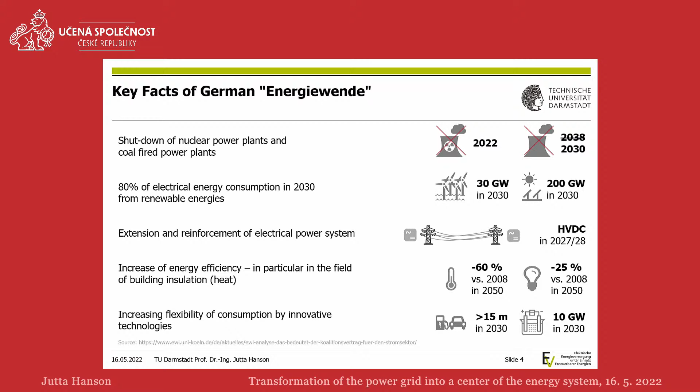The flexibility - we spoke about the complex network that is ongoing. You see here some cars, yes, of course, electrical cars, and it is intended that we have more than 15 million within 2030. This, of course, is a big challenge for the network because of the current needed to charge them. And we need a different possibility, because we speak about PV, we speak about wind, and you know this is not there all the time.

We need something reliable, and therefore we think one way is to have it with gas. Here you see the electrolyzer, and we want to have more than 10 gigawatt in 2030. You heard...

Very, very high numbers, and now let's put them together with our electrical network. What do we need at the moment? On the left side you see what we need as power - 80 gigawatt is the highest power which we need. And within one year, we need 600 terawatt hours within the German networks. Put that against our power plants. If we just talk about the load, 80 gigawatt, then we need a number of 54 nuclear power plants, if we assume a certain amount per nuclear power plant.

And if we say, no, we need it the whole year, then we know a nuclear power plant can be in operation 7,500 hours per year, and it comes to the same number. But this, of course, changes if we go to wind or to PV. You see that the power of a single wind turbine is much smaller - we are here with 2 megawatts, which is at the moment the average. It is not the highest power rating, but if you look at the average installed in Germany, then we are at 2 megawatt. And then we need 40,000 wind turbines if we just want the power.

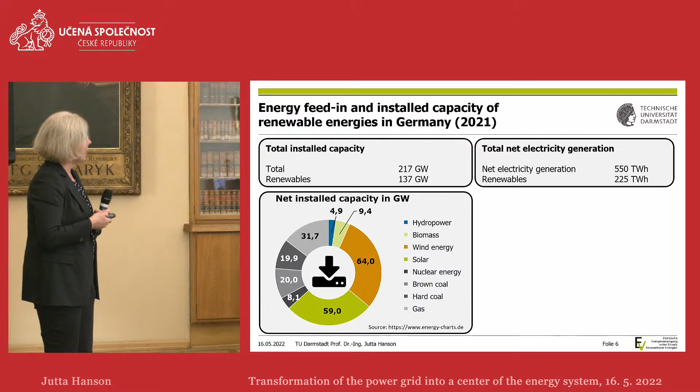This is how it is split up, and you see we have more than 60 gigawatt wind already installed. We have up to 60 gigawatt PV installed, but we want to have 200, keep in mind that one. And out of the 64 gigawatt of wind, we have not more than 8 gigawatt for offshore, and we wanted to have 30. And this is where we have to be faster.

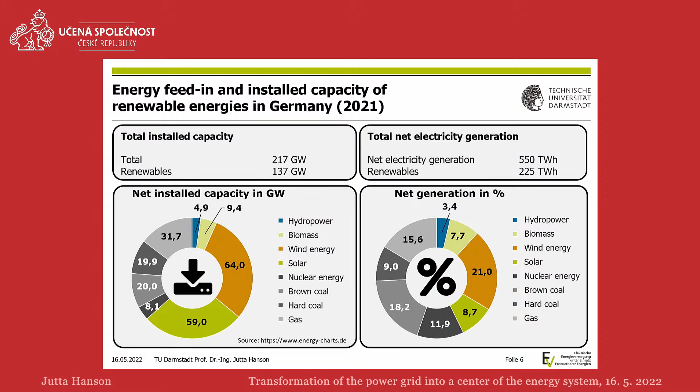And now check how the picture changes if we go to the energy. Of course it changes, because our coal-fired plants we can use more or longer within the year than we can with the wind or with the PV. And you see the reduction here from the PV, which gets a smaller number because we only have 1,000 hours per year. And the same we see here with the wind. We can discuss biomass, we can discuss hydropower, but the potential in Germany is not there. The numbers will stay like they are at the moment.

Now, what does that mean for the electrical network? Now come a little bit closer to the transmission and distribution. We have new generation within the network, and we have distributed generation. This means we have it on the roofs, we have it somewhere in rural areas, but we do not have it where we had it before. We do not have it in the area where we have coal, for example.

But on the other side, we have off-consumer generation, so we have big wind farms which we have offshore. And we also have hydropower, not our hydropower, but with our neighbors. So they are still there. And this argument is always needed if some people believe that we can have everything locally within a small area, everything distributed. This is not true. We also need our highways we spoke about. We need the transmission network.

But also how we have our generation is different. We have fluctuating generation, volatile generation, and we need a weather forecast. So our generation depends on the weather forecast, and this is not good news, because you probably believe in weather forecasts, I do not really, and therefore we have here an inaccuracy which we have to deal with every second.

And we have new generation units. Our synchronous machines, the typical type of machine within our coal-fired plants, will disappear, and we get something which is made with power electronics. Power electronics is a perfect technology. Everything is possible with power electronics, but you have to learn those systems, and this is not as easy as it could be. So this is one of the very big research topics, how we can have a stable network with all these power electronic units. So we have a change in the generation.

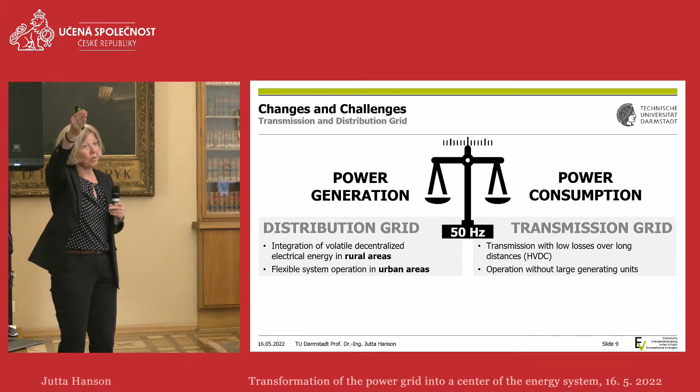What happens with the transmission grid? We already said that we need a highway. We need a highway to bring the power from the northern part of Germany to the middle or to the south. So transmission with low losses over long distances. This is our task. And please keep in mind, in the past we had the big or large generating units. They are not there anymore. We have to operate the network without those power plants, which is a challenge.

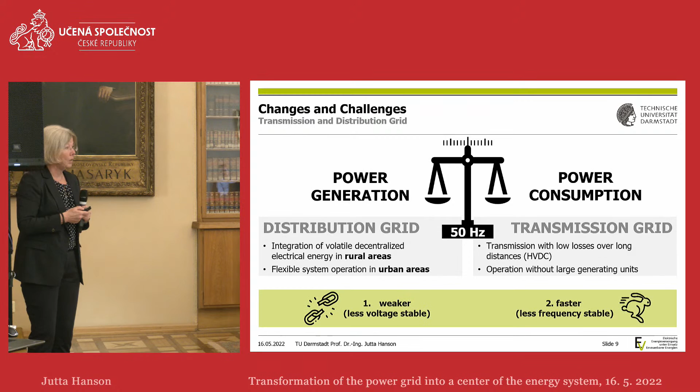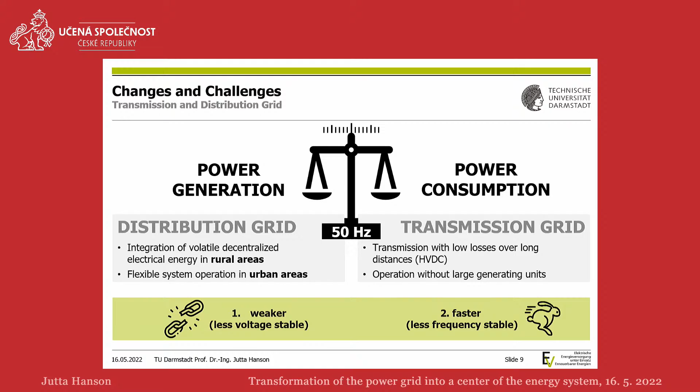We can say, and you already saw, that without those large generating units, our network gets weaker, and an expert would say less voltage stable. So we have problems staying at a constant voltage, and it is faster, and it is less frequency stable, because the change in frequency, if we have a mismatch between generation and consumption, is just faster because our inertia is missing. Our big power plants are missing. So this is our challenge.

So that's what we have to do within Germany. We are not the sunniest state within Europe. We have to use the renewables wherever they are. So the sun at the moment more in the southern part and the wind more in the northern part. Our major concern is how this network stays stable, especially if you talk about system splits.

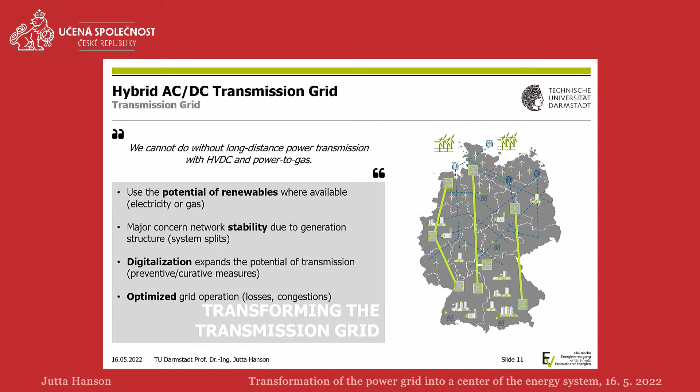And just imagine what happens if we have a windy day. We have wind here in the north and we have consumption in the south. If the network is really split in the middle, we do not have any chance that both networks stay stable. At the moment, it is not guaranteed that every partial network can stay stable. So this is one of the biggest tasks we have at the moment. But we do not want to complain, because we have new tools that we can use.

We can change our network operation. We can change our network planning. Because probably if we have power electronics, which is very fast, we can use it to get into action when a fault happens and not just in advance within the planning stage. So this is, of course, something which we could have, and we call this curative measures. So just do something if something happens within the network and not before. And then we probably need less network.

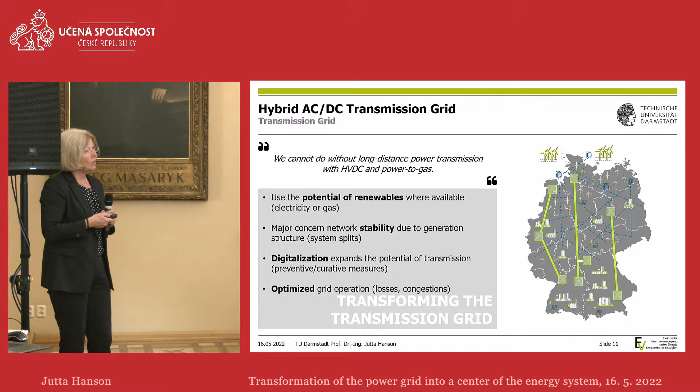The optimized grid operation should be a normal thing for us. As I already said, what we do not lose on the way from the generation to the customer is nothing which we have to produce. So you see here within the title, hybrid AC-DC transmission grid. This is something very new. Hybrid for us means that we have the combination between our normal AC network and those DC transmission grids. And our research deals exactly with those transmissions and what happens if we have more of those DC circuits within our network and we have an overlay network.

What happens now within the distribution grid? That what you recognize from your homes. Start with a rural area. In rural areas, as we already mentioned, we have wind, we have PV, we have renewables everywhere. The normal way would be that we have power plants within our top voltage levels and they feed those networks from both sides. Now it changes. We have the renewable energies at this part and we call it all for one and one for all. And what happens with this wind power if this city, for example, does not need the wind? We can feed it back to the high voltage level, but this is not what we call efficient. So we intend to have those wind farms used with more than just one network, which is new. This was not done before, so we have to change the principle of the network.

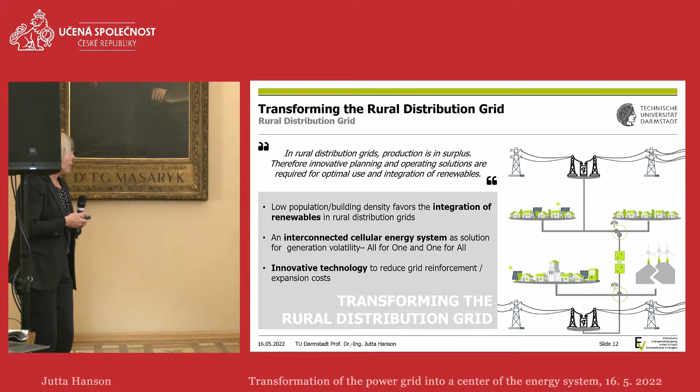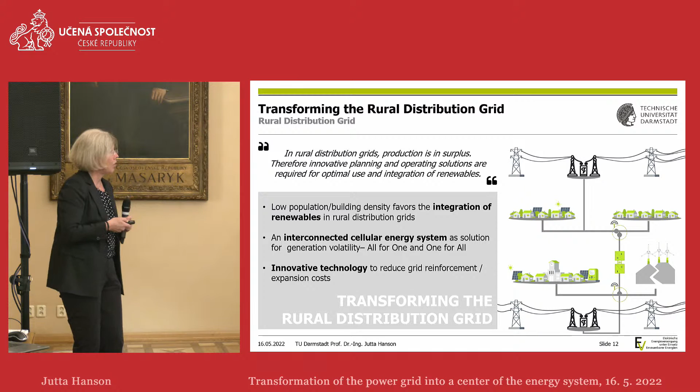And if you change the principle of a network, what you have to do first is to check the network protection. So what happens if a fault occurs? Can you recognize that fault and then can you split it out of the network, switch it off? We need innovative technology, which is not what we have at the moment, and here again you see those converters where we go from AC to DC and backwards. But this is within the medium voltage network, not within the high voltage network. So we think about new principles so that we can really have a combination and operate those networks in a different way.

So here now the research focus. We learned about the distribution networks with a large number of decentralized generation plants and a large number of operating states, because the wind is blowing, you have a wind turbine over there, a PV installation on the other side. And at the moment we have one criterion which is always limiting the integration of decentral energy generation. And what is the limiting factor? It is the voltage, because we see the voltage is going up, so we need solutions, because if you can solve the voltage problem, then you have more renewables within the network without building new network lines. And that, of course, is a good idea.

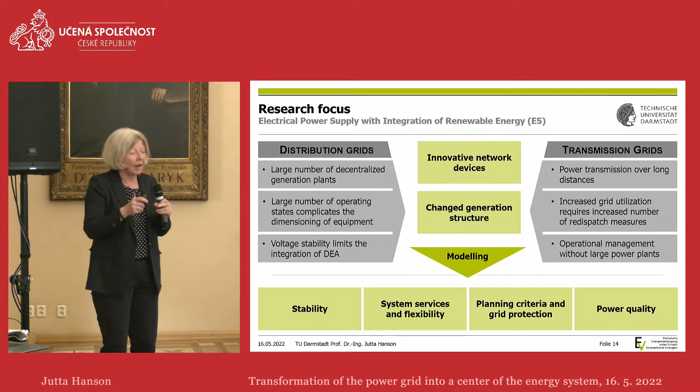And we have to take care about the power quality, which for us in the normal case means voltage quality. Because we get rid of all those linear consumers, we have power electronics with a lot of harmonics. I know this is very technical, but we have to take care, and we will do.

this overlay network, and we investigate how can we have this one in a meshed system so that we really have more than just these point-to-point transmissions. How can we enable here, for example, rotor angle stability, so that we really have a defined behavior between the voltages in the north and in the south.

Within Delta we want to find out: do we have a quarter solution? So how do we have to build the quarter so that we really can say we are as local as possible? And this is what we want to have with storages and consumers and generation.

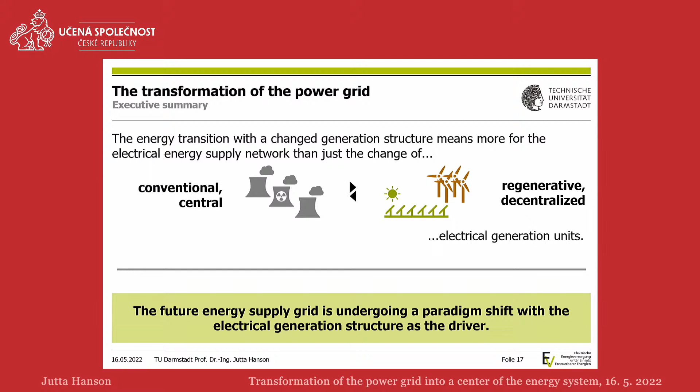central to regenerative, so renewable or decentral units. This is not what we do. We change the principle, and that we always call a paradigm shift within the network. It is totally new what we will get in the future.

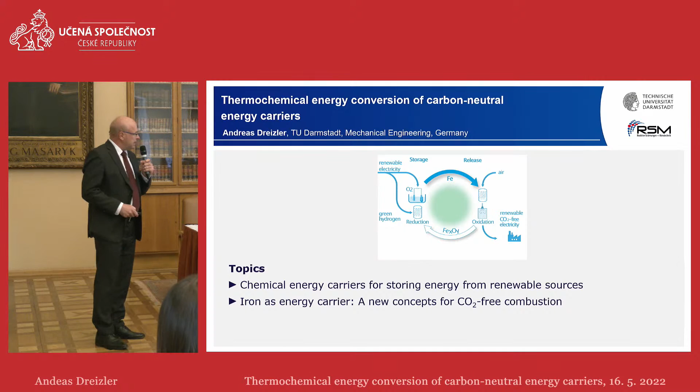Ladies and gentlemen, it's an honor to be here and talk about some aspects of thermochemical energy carriers that can be carbon neutral and can be of high importance for the transformation of our energy system. There are two topics I would like to cover. First, I would like to discuss that chemical energy carriers are one possibility to store energy from renewable sources. And in the second part, a little bit out-of-box thinking, a new idea to make use of iron as an energy carrier that can be used later on for CO2-free combustion.

Looking at the challenges, transforming the energy system means, as we have just heard, affecting all sectors: electricity, heat, mobility, industry, buildings. Sorry for taking Germany as an example again, that's where I have the numbers. In 2020, we contributed roughly 740 million tons of CO2 equivalents, corresponding to a little less than 2.2% worldwide.

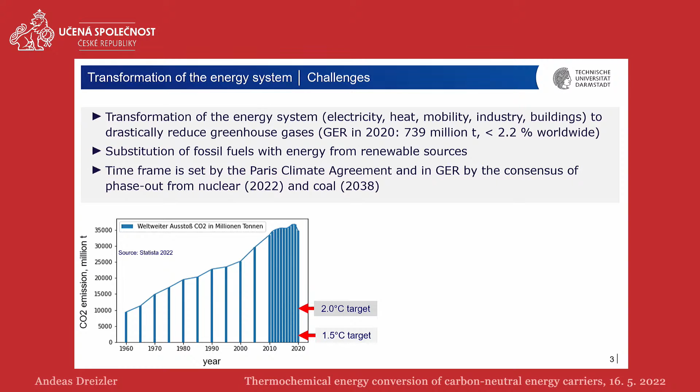To reach the targets set by the Paris Climate Agreement, we have to reduce significantly to reach the 1.5 degree Celsius target. That's quite ambitious. In addition, at least for our country, we are phasing out of nuclear energy, and the plan is to phase out of coal as well. So we have to act now.

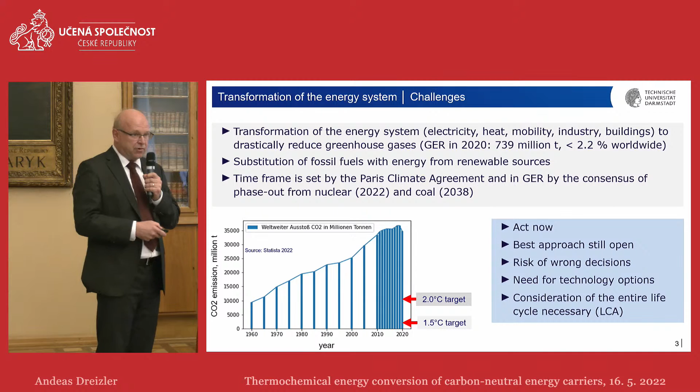I just repeat what Jutta said, but from my perspective, it's not clear which pathway is the best. If you do not know exactly which action is the best one, it might be different for different countries, and there is a risk of wrong decisions. So from my perspective, we need technology options, and for that choice we need the entire life cycle, the carbon footprint, to be considered. LCA is, I think, a very important aspect and needs to be developed much further.

I would like to focus on power generation to follow up on what Jutta was talking about, and give some more background information about volatility. Looking back 2 years, we needed 545 terawatt hours. Jutta had very similar numbers, maybe not exactly the same. Looking at hydropower stations, taking the largest one in Germany, that would correspond to more than 80,000 hydropower stations, to give you an idea.

We look here at the capacity profile over December 2019. We see that in the peak we need 80 gigawatts. We see a constant contribution by hydropower and biomass, which cannot be easily expanded. We see nuclear here in red, which will be faded out by the end of the year. On the other side, these small yellowish areas are due to PV, because it was December, so not too much was produced in Central Europe. The remaining part, shown in greenish color, is wind, and the rest is from fossil fuels: lignite, black coal, but also gas, which we know we have to change.

There are times, like this day, where wind was quite significant, but we also see a short dark period around Christmas where almost no renewable energy was available. So for the moment we have an energy mix of fossil, nuclear, hydro, wind and solar. We already heard from Jutta that integral values for renewable energies are between 40 and 50%, but if you look at a certain instant, it can be down to just a few percent.

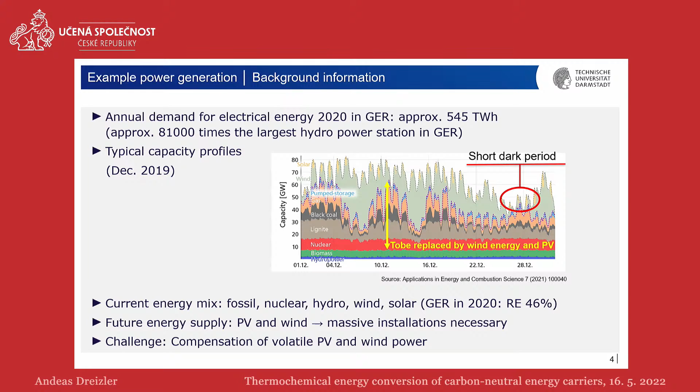In the future, we need a massive installation of PV and wind, but the challenge remains that they are volatile, as we have seen. So we have to compensate for this volatility. We've seen these numbers as well: full load hours for PV below 1,000, wind onshore 1,600, while lignite, for example, a conventional central power station, is much longer.

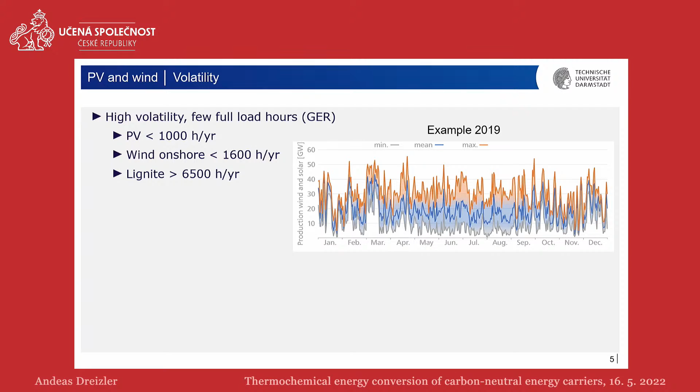To give you here the temporal fluctuations, you see the production rate of wind and solar over the year 2019. If we take just the mean value, the dark blue one, you see we provide here in the order of 20 gigawatts, which means, as we already have installed in the order of 120 gigawatts, the installed capacity must be much larger than the required capacity.

Looking at the future, depending on the scenario, depending on electromobility and so on, the numbers go up to 600 gigawatts. You have read in certain scenarios from DENA studies, for example. That means a factor of 5. I would say it's more or less impossible to get those systems installed in Central Europe.

So what we need, from my perspective at least, is storage and transport of energies that came from renewable sources, but not necessarily from Central Europe.

Looking at the possibilities of how we can store energy, you see here a chart showing how you can classify that, for example using the storage capacity, which ranges from kilowatt hour to a terawatt hour, so a logarithmic scale. You see as well, in a nonlinear scale from milliseconds to year, the so-called withdrawal rate. That is the time you can extract energy at a power level of that specific energy storage.

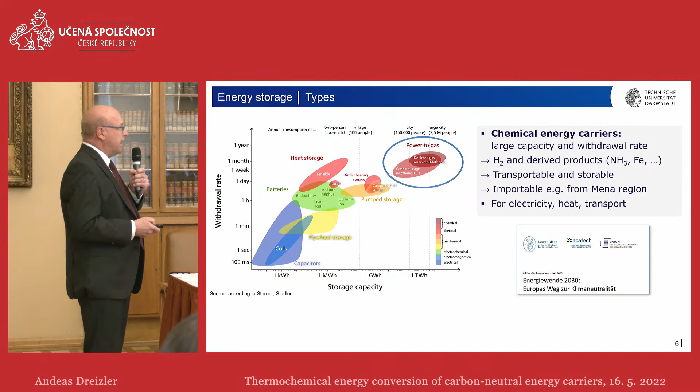I think we should look as well at other carriers of renewable energies that could be green ammonia. It could be metals, like iron. Those are transportable and storable, and they can be imported maybe from the MENA region, the Middle East and North Africa, where partnerships have to be built up. Maybe we can import energy as we do now.

Once shipped to Central Europe, you can use them to generate power, to generate heat, and for transport. So the take-home message from this chart is: chemical energy carriers are best suited for storing energy, at least at large quantities.

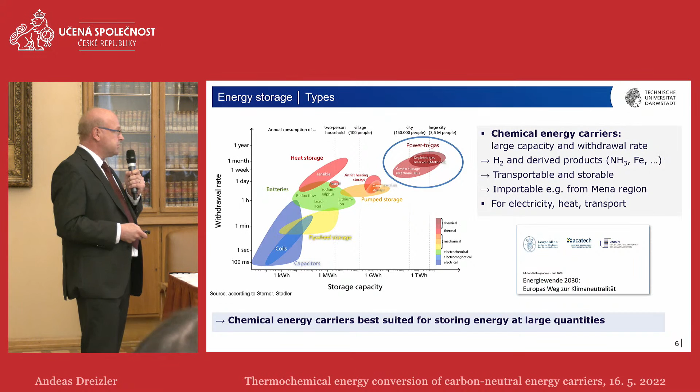Now, if you take these chemical energy carriers to store renewable energies, you can distinguish them further. One possibility is to take, for example, synthetic natural gas, meaning one that contains C atoms, or liquid fuels as well, synthesized making use of renewable energies, like methanol or oxymethylene ether, which is a surrogate for diesel fuel.

To make them really CO2 free, you have to extract the CO2 from the atmosphere, because afterwards, after use in engines or in fuel cells, it doesn't matter, you will release the CO2 again. To have a closed circle, the atmosphere is part of the thermodynamic system, and that is not coming for free. Looking at different studies, you find numbers between 20 cents to 50 cents per liter, or 100 to 200 euros per ton of emitted CO2 equivalent.

That's one possibility. The other one, you can go carbon-free - we just mentioned hydrogen, ammonia, maybe metals, semi-metals, non-metals. Then, because there is no C element involved at all, it can be CO2 free, and the atmosphere is not involved. Let's have a look into their properties, and I'll just take here one chart about it.

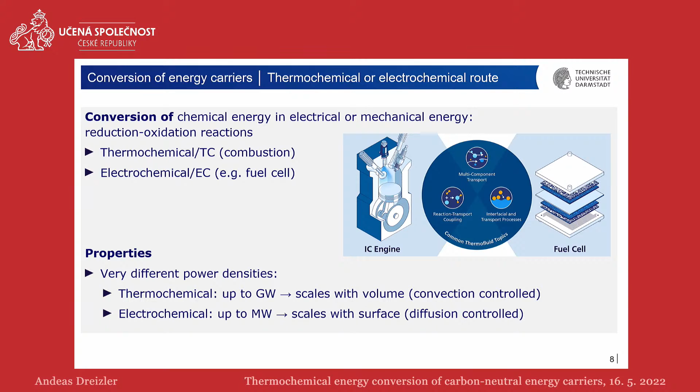So as an interim conclusion: chemical energy carriers are needed to store energy from renewable sources, and it depends on the application whether electrochemical or thermochemical energy conversion is better. You cannot say one or the other, because once you need higher power densities, you need thermochemical pathways, meaning combustion technologies will be part of the solution.

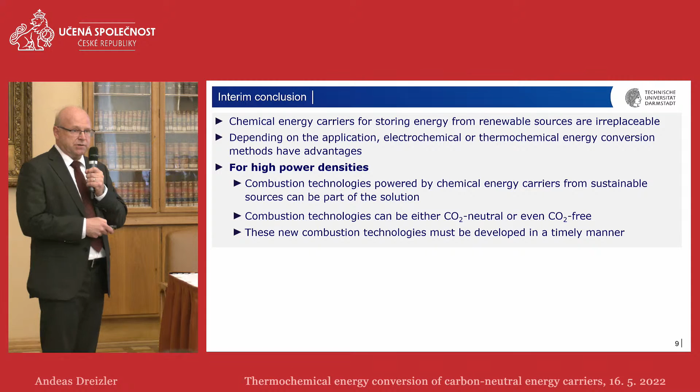That's my strong belief. As I've said, combustion technologies fueled with hydrogen, for example, will be CO2 free. If you use synthetic natural gas, they are at least CO2 neutral. But those combustion technologies do not exist commercially yet. For example, people talk about hydrogen, but there is not yet any commercial gas turbine that can be operated with 100% hydrogen. Doesn't exist yet. It needs to be developed in a timely manner.

And that brings me to the second part of my talk. There are technology options to make use of hydrogen, of ammonia. I will talk about why this is typically used in connection with hydrogen, or has to be used in connection with hydrogen. But most of the remaining time I have, I will spend on using iron particles. So we start with hydrogen.

There are, of course, different ways, and all of you know about the fuel cell, but there are other ways too. They provide very high thermodynamic efficiency, and almost no one knows about it. This idea is not actually very new, it already exists for some years. This is the argon hydrogen engine. It can be used for stationary power and heat generation, and the potential is thermodynamic efficiencies up to 80% if you take a compression ratio of 20.

The idea is the following: you take hydrogen that has been produced from green energies, and then drive the engine cycle with argon. Argon has no rotational and vibrational degrees of freedom, so you don't have these compression losses. Then you inject hydrogen and oxygen, and burn it with very high thermodynamic efficiency. You receive water, and argon has to be separated from the water and kept in a circle. This is why you can only do it stationary.

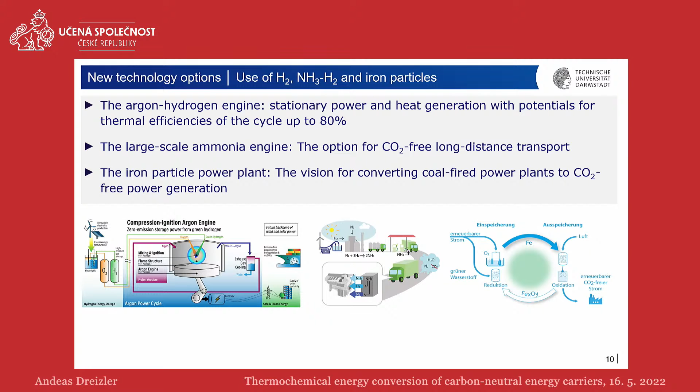And the last idea is about the usage of iron in particles and build central power stations out of that, or making use of coal-fired power plants and convert them. We call that retrofitting. That's an idea, and you have to consider that currently more than 1,000 coal power plants are built worldwide, and 2,000 or more are planned. And those are typically operated for decades, maybe 50, 60 years. And you need options to make them lower in their carbon footprint.

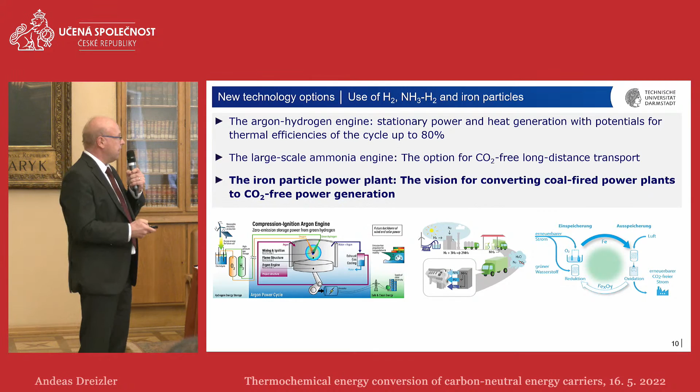And so this is what I would like to give some more ideas about, and this is what I said, a little out of the box. It's a relatively new idea, and you see in the background the idea of using renewable energies in connection with central power stations that already exist, and make use of iron and its oxides and guide them in a circle. And this circle is shown over here.

I guide you through. We start with the iron oxides. This is rust in particles, and this can be chemically reduced, making use of green hydrogen that has been produced by electrolysis from renewable electricity, in fluidized bed reactors. That is one possibility. The other one is you dissolve it in an electrolyte and go the direct pathway using renewable electricity, and electrochemically you reduce the oxides back to elemental iron.

Once you have done that, you put it, for example, on a ship. You take it from, I don't know where, Australia, from Morocco, wherever you have your partners, and ship it to Central Europe, containing now the renewable electricity in a chemical form. And then you burn it with the oxygen from air, again using fluidized bed reactors, or these are dust firing power plants. The most coal power plants in Germany are dust fired, where you have different diameters of particles. But this is maybe a detail we don't have to discuss over here.

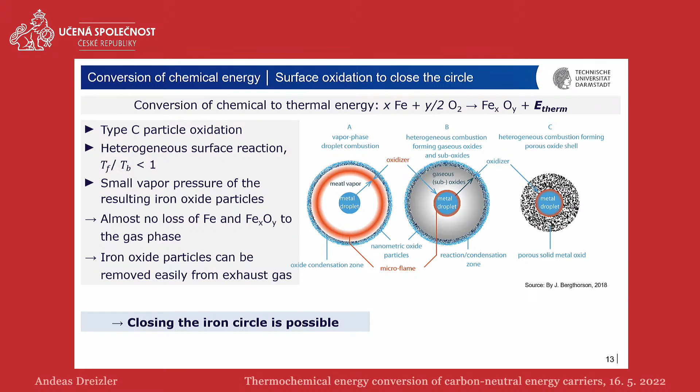And that is why the iron oxides as particles can be removed from the exhaust gas by a cyclone or by a filter. So closing the iron circle is possible. And now the idea is to replace fossil fuels for high heat applications, meaning above 750 °C. And that can be done for industrial heat, melting materials, for recycling. It could be done for chemical production, or it can be used in power plants that could be retrofitted to drive turbines. And this is where I have a few charts with a little more information.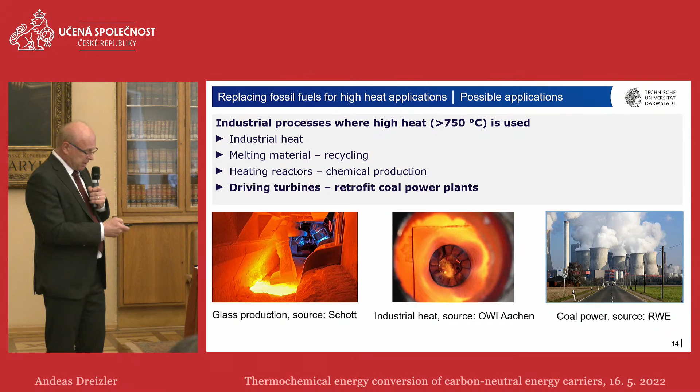I show you here Niederaußem. This is a large coal power station in the west of Germany, operated by RWE. So the idea, at least the one we follow, is to have an existing coal-fired power plant retrofitted and operated with iron particles. Still, we have to convince people that this is a good idea.

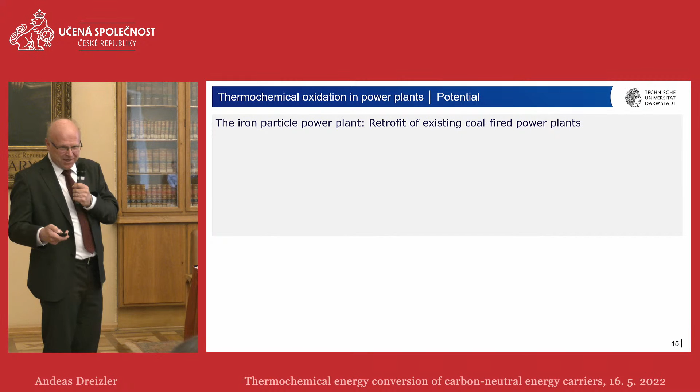We just started research on that. And then these power plants could be used as standby power plants in Germany to compensate for volatile renewables, but maybe in other countries, we should not only look into Central Europe, but we should look as well in other countries where they currently build new coal power plants. Maybe their retrofit could be used as well for central power generation for normal operation. We think that using existing infrastructure might help for a better market entry.

We have estimated, it's not me who did that, it was my colleague Johannes Janicka who did that recently, the efficiency potential, which is in the order of 46 to 48%, a little higher than hard coal, for example, because you don't have to remove SOx, because you don't have to mill the coal, and there are some other reasons why we have a little higher efficiency perspective. And then the iron cycle as well, as I mentioned already, has at least a comparable efficiency compared to hydrogen in connection with the gas turbine, which, by the way, as I said, does not yet exist either.

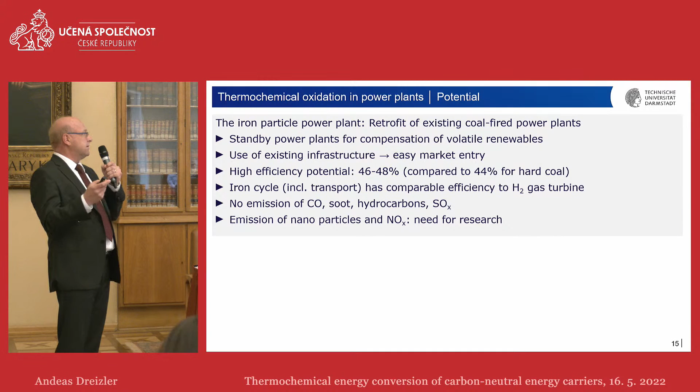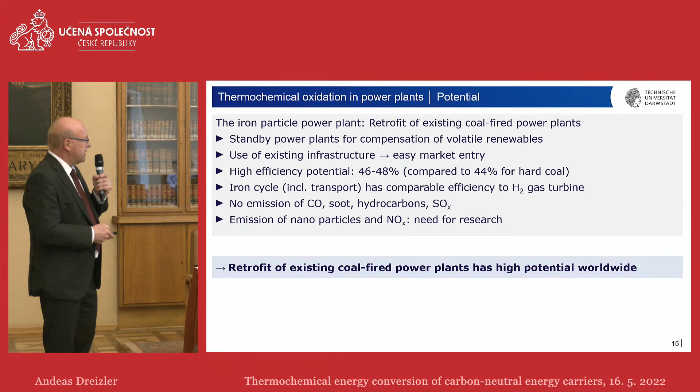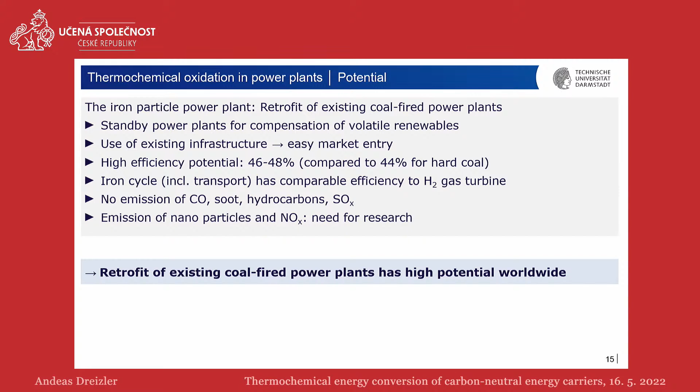We don't have any emissions of CO, soot and hydrocarbons because there's no C atom. We don't have any emissions of SOx because there's no sulfur, but there might be emission of nanoparticles and NOx. And that is currently actually the only bullet point where my own research is going on. So we're looking into these interesting issues. However, from that perspective, at least, this could be a way to make use of existing infrastructure, and it is something that might be used as well outside Europe.

However, let's now have a case study. As I already said, we make use of Niederaußem, this power plant you see here. A couple of years back, they produced 23 terawatt hours in the year 2018, and it was operated with lignite. And now we want to think about replacing that by firing with iron. For that study, we assumed an efficiency of 40%. And then the requirement for iron powder would be 28 megatons per year.

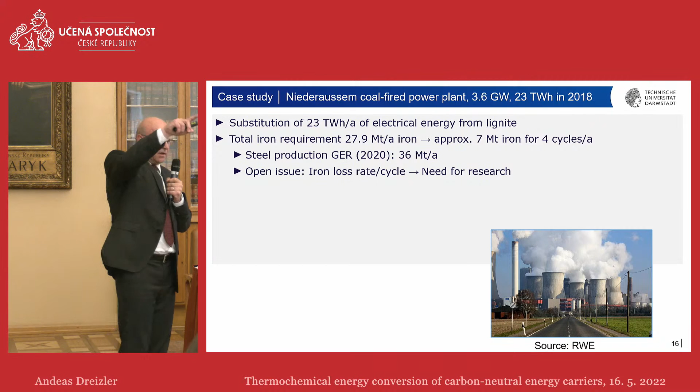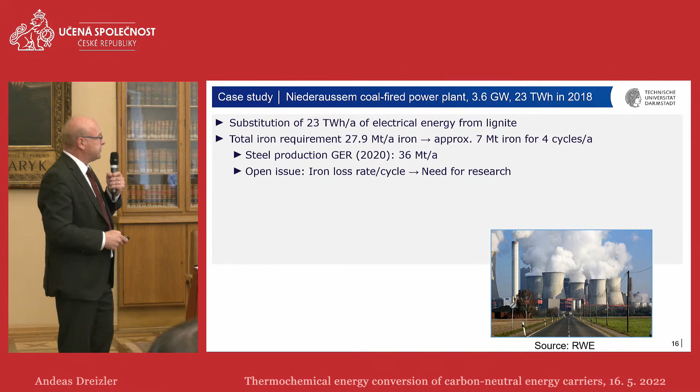Let's assume that you can guide it in a circle 4 times a year. After you have burned it, you collect the particles, the oxides, you bring it back maybe to Morocco, you chemically reduce it again and bring it back within 3 months. You do it 4 times a year. That means you need 7 megatons. Compare that to the steel production in Germany. 2 years back, that was a factor of 5, so 35 megatons per year.

Ideally, you just need this iron once, because you would guide it in the circle all the time. But that's a dream, it's idealized. There is a certain loss rate for sure, but we don't know it yet. It needs to be researched. Let's have a look now at how much hydrogen you would need from renewable sources for the chemical reduction, and you end up with 1.5 megatons of hydrogen per year.

And now assume that you have an electrolyzer which is operated by wind and PV, and this is operated for 4,000 hours per year, which is quite optimistic, I would say. Then you would need 25 gigawatts of capacity just to get this amount of hydrogen which is needed to get the iron in the cycle. Let's have a look at the plans. I have a little different numbers, Jutta. I'm not sure where you have the 10 gigawatts from.

At least from the hydrogen strategy, I read about 4 gigawatts in 2030 for Germany, and for the European Union, 40 gigawatts. Compare these now to these numbers, and you see that maybe with the European plans, if this number would be correct, you can replace 2 of these coal power plants, independent of whether you burn iron or hydrogen directly, that's the same magnitude, and you see that iron is not the showstopper.

The showstopper is that we don't have the capacities of the electrolyzers, which, by the way, in another project I'm involved with, we are currently developing to upscale them, because we don't talk about costs for the moment, but it will be extremely expensive to build up all this infrastructure.

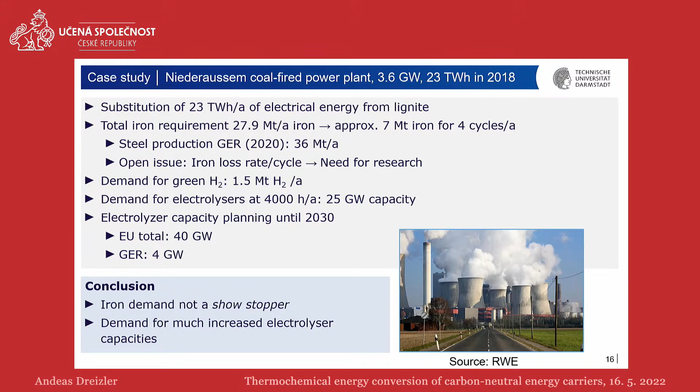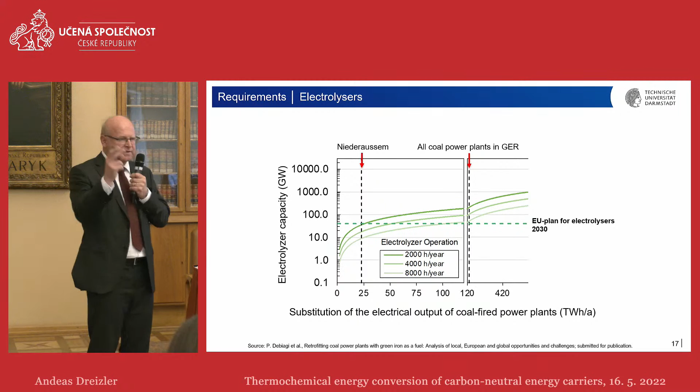Maybe just in a graphical view, you have seen here the electrolyzer capacity, and here's the substitution of the electrical output of coal-fired power plants, and here was Niederaußem, 23 terawatt hours per year. If you now take all coal power plants in Germany, which was, I think, last year 120 terawatt hours, something like that, compare that to that green line, which is the European plan for electrolyzers in 2030. You see, if you take again these 4,000 full load hours per year of the electrolyzer, there's a significant gap.

So with that planning, although this is already quite ambitious, it is by far not sufficient. And so we need a massive installation here, not only of PV and wind, but also a massive installation of electrolyzers. And so we should be honest, this will be very expensive. I don't know numbers, sorry, but it will not come for free.

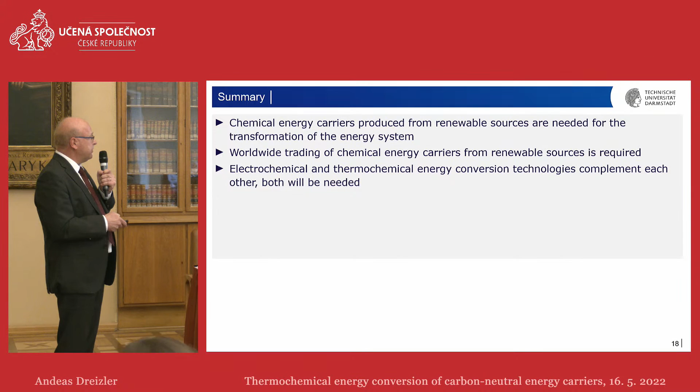And so this brings me to the summary. So the take-home messages from my side are: chemical energy carriers are part of the solution. We need a worldwide trading of chemical energy carriers, because in other countries it is much cheaper to produce power from renewable sources. We will not only rely on electrochemical devices; my strong belief is we have to use thermochemical energy conversion technologies as well, because they complement each other. And both will be needed, and the other word for thermochemical energy conversion is combustion.

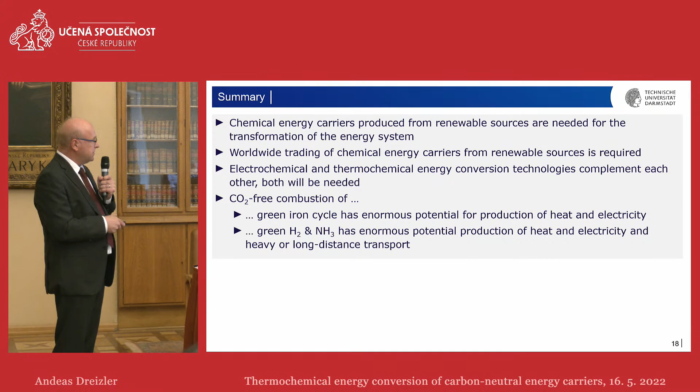And CO2-free combustion is doable, for example, by the iron cycle, with the potential for producing heat and electricity, but not for mobility. For mobility, hydrogen and ammonia are the better choices. And with that, I think we need quite some efforts to achieve the Paris targets in 28 years. I think in Germany we agreed politically to do it 5 years earlier. And this can be done only when we have extensive research and development in energy science.

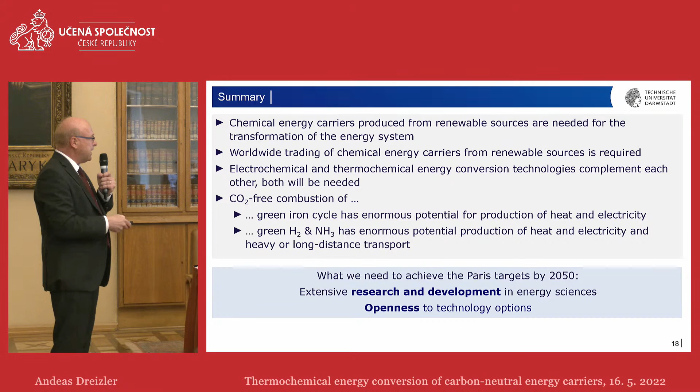And what we need as well, I think, is openness. We should not be fundamental and say only this option is the right one, because we do not know yet. And that is why my plea is for openness to technology options.

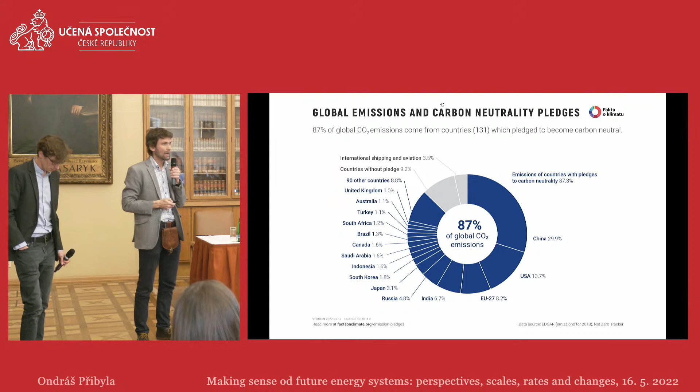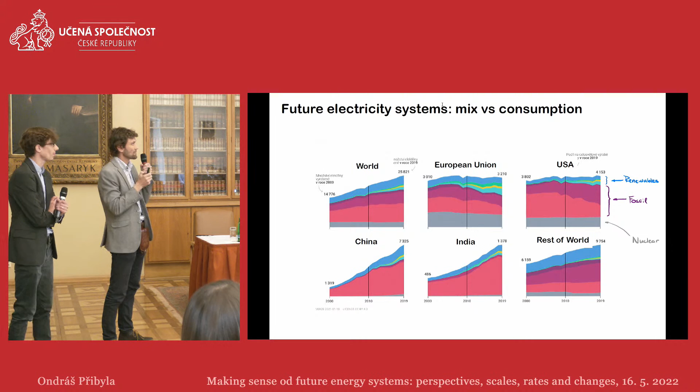The question is, is this a relevant way to look at things? Because you see that all these graphs are of a similar size, while China and European Union are not of a similar size in terms of population. So we can plot not just the mix, so to say, but consumption per capita.

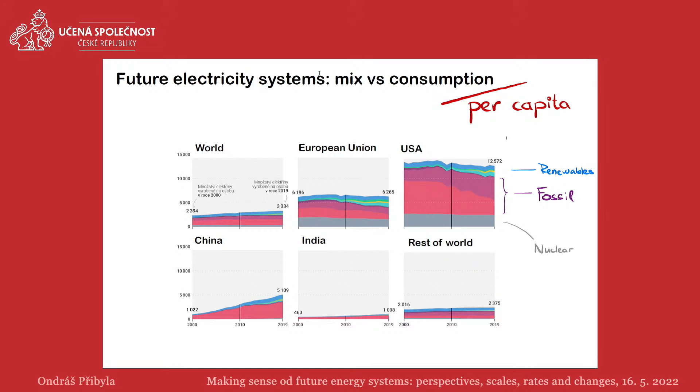And here you see a completely different story. While consumption in European Union remains reasonably flat, and USA too, you can see that USA consumes 2 times the electricity per capita than the European Union. India is barely visible on that graph. China starts to be visible and starts to be comparable with EU.

I said that we will need to electrify everything, which means also in EU and USA the consumption of electricity will go up. We will also need to think about energy mix. So I would like now to focus your attention on how we can think about energy mix.

Let me add one thing, because you said consumption will go up, but you didn't quantify it. I think it's good to inject a rough estimate here. Worldwide, but also in the EU, think of something like 2x, so an increase of 100% in consumption 30 years from now. So the size of the problem is now double in terms of covering our electricity needs, as a rough estimate.

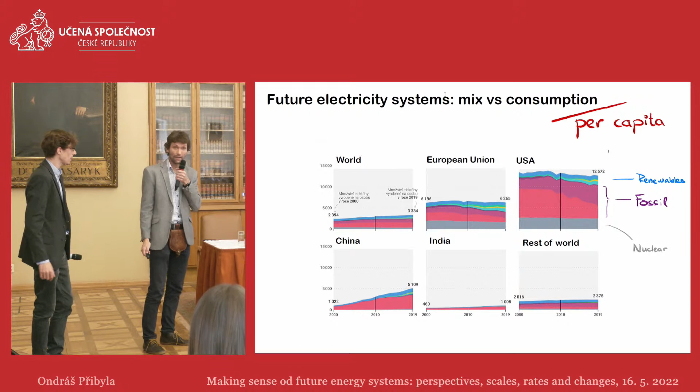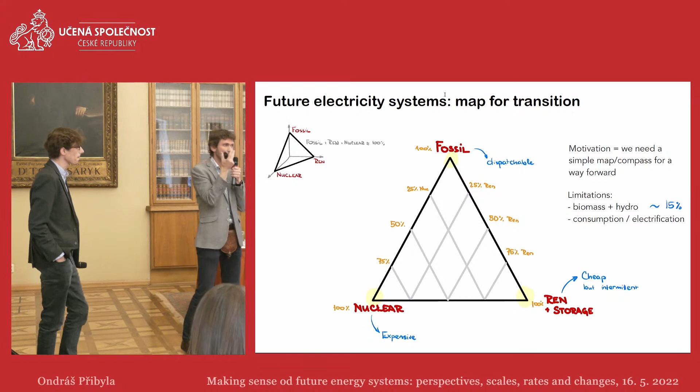So how can we think about the future electricity mix? Basically, there will be three pillars of any electricity mix: nuclear, fossil, and renewables. We can roughly say that the sum of nuclear, fossil, and renewables should be 100%, which gives you an equation of a plane, and basically the plane gives you a triangle. So this is just a play with the geometry of the space.

The triangle gives you a nice map, a very simplified map, but this map could be useful for people to think about the transition. If we want a society to go some way to the future, we need a way to show the path, we need a map, and this works roughly as a good one. The limitation is there is no biomass or hydro included. But this is up to 15%, so there is something, at least for Czechia, at least for the Czech Republic. And the limitation is that in this picture, there is no consumption rise or electrification shown.

Fossil fuel's main advantage is that it's dispatchable, but it produces greenhouse gases. So we need to go down to a mix of nuclear, which is expensive, and renewables, which is currently reasonably cheap but also intermittent and volatile.

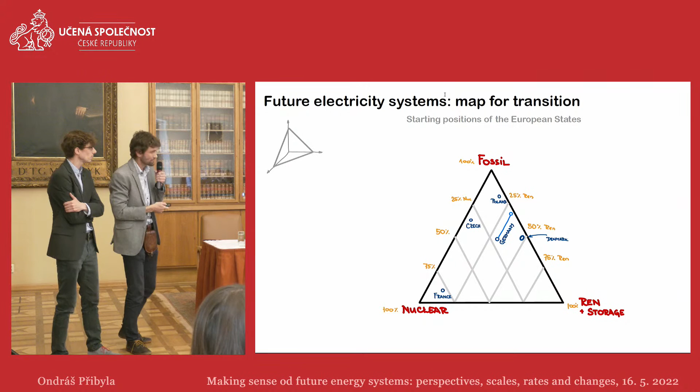Germany is starting here, but during this year it will move up to this point. And there is also Denmark, for example, which is roughly 50% between fossil fuels and renewables. So these are the starting points. Where do we need to go, and what are the limitations of the path?

We can think about it as a chess game. I hope many of you play chess, so you know there is a different strategy in the opening, middle game, and end game. By the same principle, we will have different strategies in the opening game, middle game, and end game for the energy transition. The opening and middle game allow no nuclear power plants to be built, because it takes time to build a nuclear power plant. This is the game of electricity chess for Czechia, so Germany has a completely different game, and so on.

I started at the starting point of Czechia. We can either stay in place, or we can start to move towards more renewables. Only in the end game does a portfolio of changes start to appear. We can either choose a strategy to go 100% renewable, or stay partly nuclear, or go more towards the nuclear direction, each with advantages and disadvantages. The overall strategy for the opening and middle game is basically to install as much renewables as we can, because in Czechia we have so little that it's barely worth mentioning.

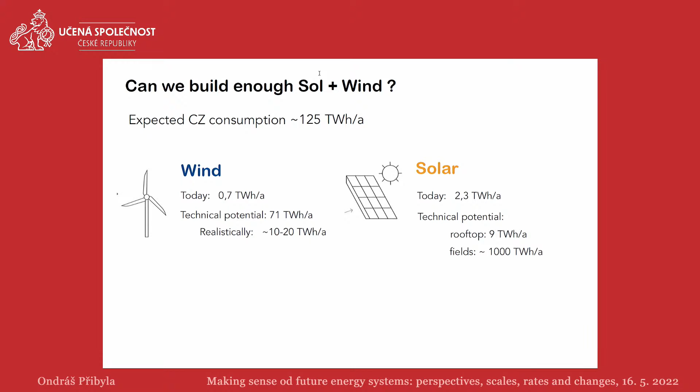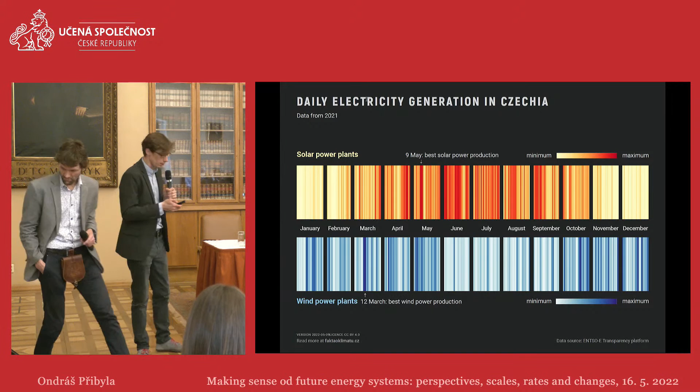The second question is about intermittency. This is a graph of solar and wind production over the last year in Czechia, where the color represents the daily production, each stripe represents one day of the year. The redder the color, the more solar electricity is generated; the darker, the more wind electricity is generated.

What you can see here is, first of all, seasonal trends. We create more solar electricity over spring and summer, and there are a lot of variations over individual days. To quantify the variation, as mentioned before in one of the talks, we need to quantify the difference between the minimum and the maximum for solar and for wind on this map.

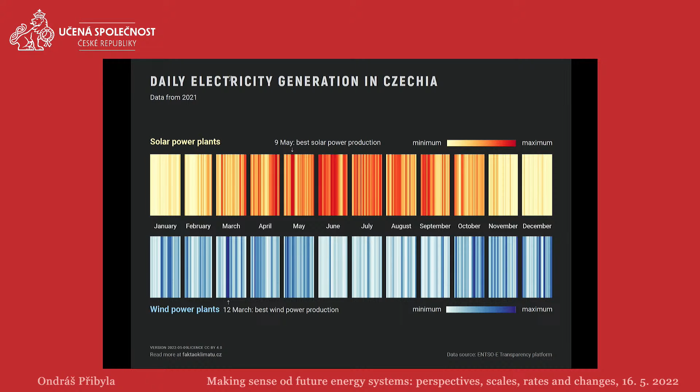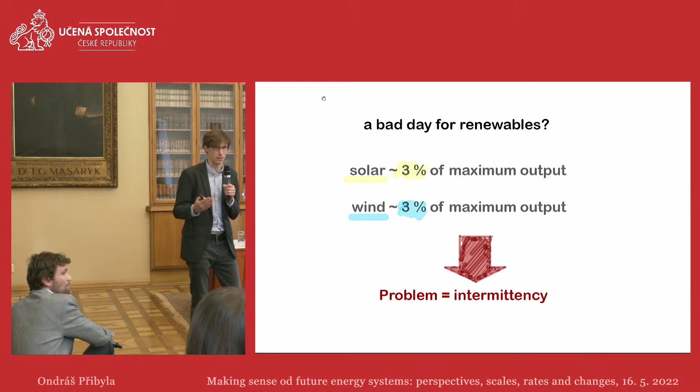And this is a sad story, because the difference between the minimum and the maximum, the minimum is like 3% of the maximum, and this can happen at the same time. So if there is a bad day, we get just a couple percent of electricity from solar and wind in Czechia. So intermittency is a real problem and needs to be addressed.

So we look quickly at 4 strategies for how we can address that. The first is that the variation of weather gets evened out if you look at a larger area. Czechia is a small country, so the weather is quite uniform in Czechia.

This basically calls for building up more and more interconnectors. It's hard to be self-sufficient with wind or solar in a small region. Obviously this is costly, as we've heard in the first presentation - connecting Europe more and more is costly and takes years. But if we want to minimize storage, or if we want to use a lot of the electricity we actually create, we just need to connect Europe better.

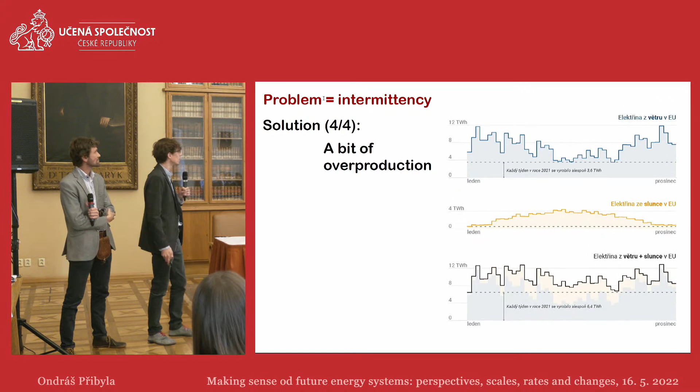Yeah, a bit of overproduction. Now come hands-on pictures, and this will be a bit tricky because we had a technical problem with images and connecting the device to the projector. So we will try to do our best while zooming on these pictures here.

So basically what I want to convey in the last part of the talk is it's good to look at statistics and graphs, but what gives the best insights is looking at the hourly production, like how does it look in real weeks of the last year. And we have artificial plots.

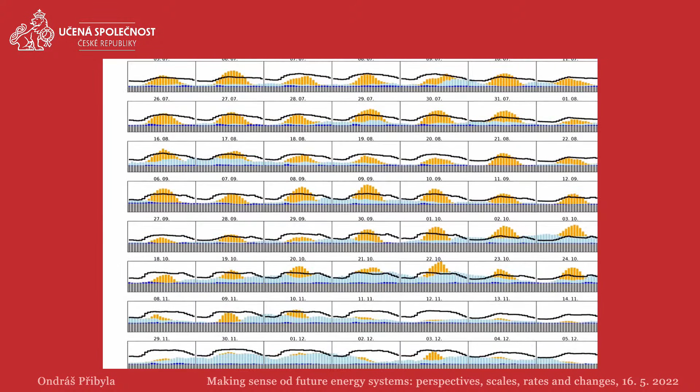So you see, this is not every week of the year, some weeks are missing. Here you can see these are the hours of the year, and this is the hours when carbon-free electricity is missing—so most of the hours of the year. Oh, and now we've lost it again.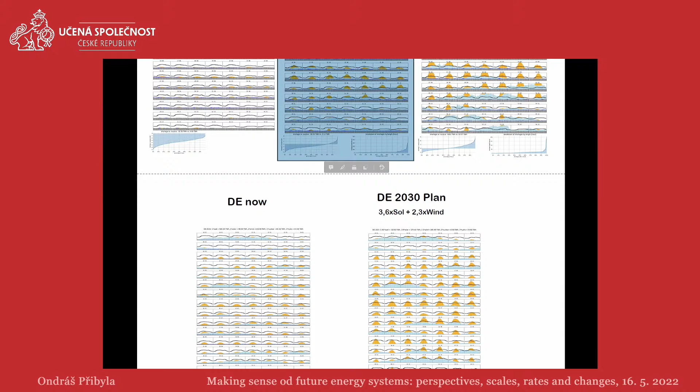Anyway, some hours of the year we would have a surplus of electricity. So you could have batteries that you would charge maybe 20% of the time.

Let's move to the extreme case for Czechia. What's the time mark? That's good.

So this would be doubling again the production in Czechia. And as you can see, the excess electricity gets massive in some of the weeks. But still there are weeks, like this one, where you get almost nothing in some of the days.

So this is again a call for, we need interconnectors. Czechia is so small, or we need a lot of... both of the talks before gave you some solution. We need either really strong interconnectors to get electricity from somewhere else when the weather is good there, or we need good long-term storage to create electricity from other sources. But this is maybe on the edge of what we can get from wind. From solar, we can easily get so much. It's just a matter of years to build it up.

Let's look at the next slide, which is Germany, because we've got some speakers from Germany. And by the way, in the previous graph, I kept the load the same no matter how I scaled up the production, so this did not respect the increase of consumption of electricity.

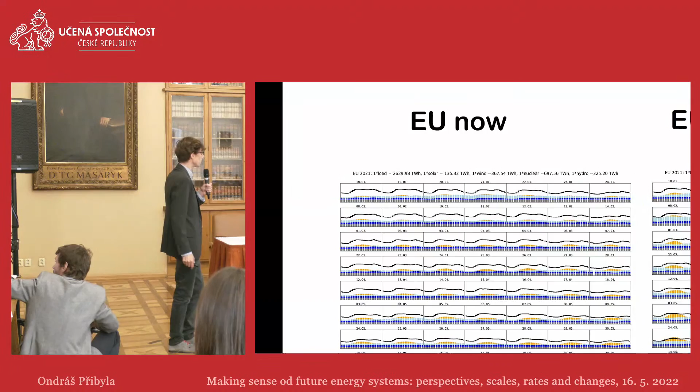Let's look at the extreme example, and this is the aggregate over the whole Europe, which is super simplified. Obviously, we cannot easily transfer all electricity from one part of Europe to any other part of Europe. So this is like an abstraction of perfect transmission of electricity. So EU, I think this is EU 28.

Today, also visible amounts of electricity from solar and wind, but not truly covering the needs. This is not so important. Can you move to the right side?

This is if we just double the production of solar and wind. It's a big feat, but if we double it, you see a lot of days we almost touch the demand line. And if we go even more extreme, which is 5x, we could then look at the points in between. Maybe 3x or 4x would be almost enough.

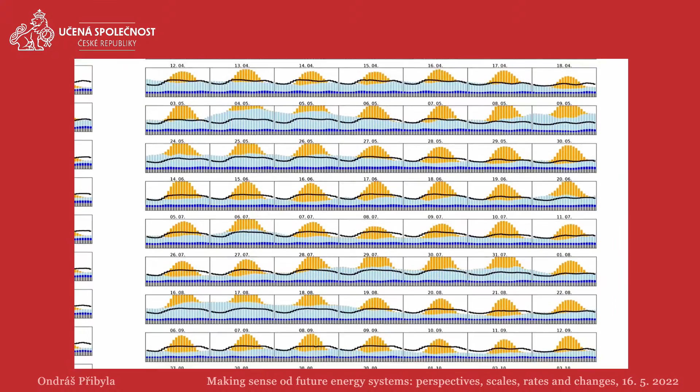If we multiply by a factor of 5, you see that rarely ever is there not enough electricity in the given hour in Europe. Maybe you can go down to see a bit more weeks. This is the summer, a lot of overproduction. This is the winter, again, a lot of overproduction from wind.

And here you see the graph of shortage of electricity, which happens but rarely, and the surplus. So you would see that 100 gigawatts of surplus electricity happens 40% of the time. So you could build up hydrogen electrolyzers with this capacity.

This 100 is consistent with the number in the lecture before for Europe. The plan was like 30 gigawatts, I think, for Europe. So if we manage to build up so much, 100, then we would make use of them just 40% of the time. So we would get a utilization rate of 40%, which is good, but very far from 100.

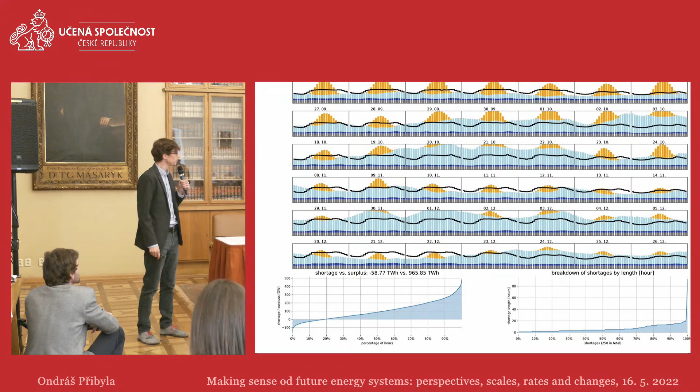Okay, let's summarize. Maybe you can, Ondráš, summarize the first part in a bit.

Okay, so what to take home from our... I'm hesitant to call it a lecture. It's just let's look together at the system and problems. Yeah, presentation, looking together at the problems, yeah.

So what to take home? Well, there will be different parts of the game, and the strategy for the opening game and the middle game is quite clear. The end game will be difficult because of the intermittency of solar and wind. And we can try to communicate this with a simple graphical map, so to say.

And there is room for growth for Czechia renewables. In order to grow, we definitely need governmental support, which is kind of non-existent at the moment, to really build up. And we don't face the issues with intermittency for quite a bit if we build up more capacity. This is not the problem for this decade, that we don't know how we're gonna cover the missing bits.

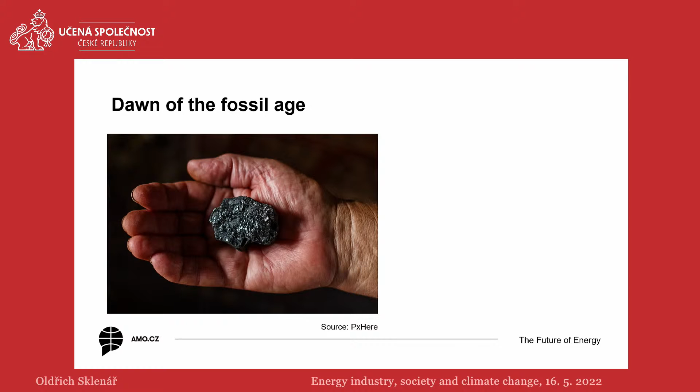This happened more than 5,000 years ago in ancient China, and according to the archaeologists, it was the first use of fossil fuels for energy purposes. So today, like more than 5,000 years ago, today we can say that we gained most of our current wealth thanks to the fossil fuels.

Let's say that our economy is still based on fossil fuels. We are using them to heat our homes. We are actually using them to produce the food we eat, to commute every day, and of course to produce electricity for all different electronic devices we are using, including this microphone, this computer, and those lights.

As you know, unfortunately, there is a catch. This catch is named carbon dioxide and other anthropogenic greenhouse gases, which induce climate change, which has the potential to turn lives of this and further generations completely upside down.

Well, of course, there are more catches. One of them is support of non-democratic regimes from which we buy these fuels, and some different aspects. But let's say that this one is and will be for the next generations the biggest challenge. Now the question is what to do, how to get out of it. The answer is simple: just don't use fossil fuels, which sounds easy, but as you know, it's not.

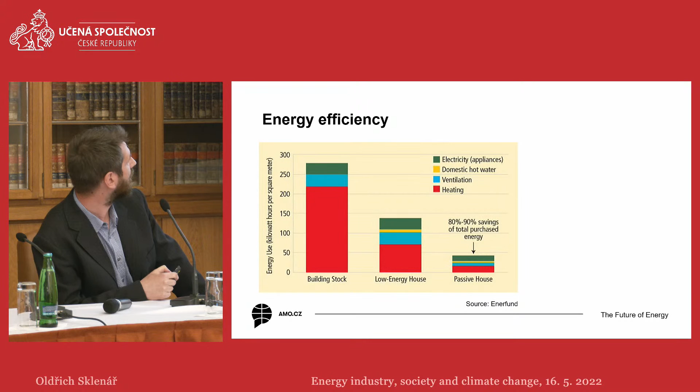So one practical example: on this slide, you can see differences between a standard building on the left. Okay, no. Yes, that's the current energy consumption, and on the right there is energy consumption of a passive building, of the passive house. As you can see, by use of different technology, you can save up to 90% of energy. The problem is that currently in the Czech Republic there are less than 10,000 passive houses

compared to several million other buildings. And as I mentioned, we actually don't have time, and not only time. In some cases, we don't have the manpower to rebuild all of those buildings to reach the same efficiency. So the question is actually how we are dealing with the existing buildings.

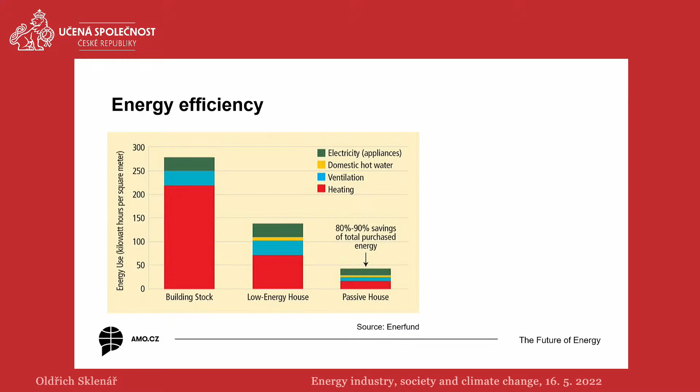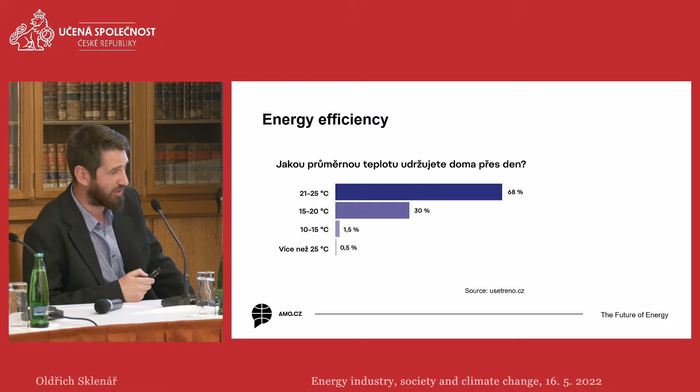If we replace our current coal boilers or nuclear power plants with some renewables, the situation will be a bit better. But then we need, on the other hand, some systems for storage, also without the best efficiency. It's important to think about how we are dealing with energy now. The situation is similar with transportation.

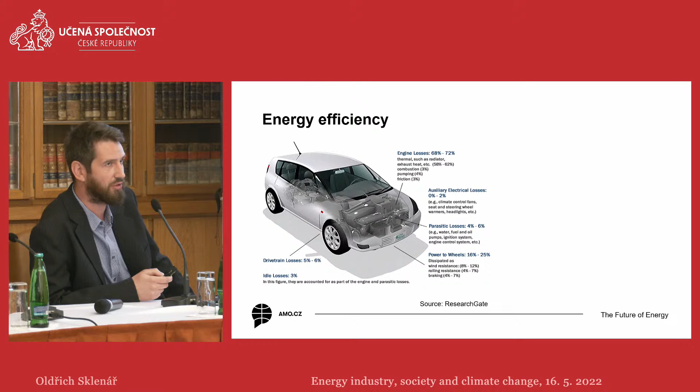Maybe most of you know that in the case of an internal combustion engine, the power-to-wheel efficiency is less than 25%. The rest are losses. Of course, if we use an electric car, the efficiency is higher, but then we need to count with the efficiency of electricity production. Maybe in those cases it's sometimes better to think out of the box, because from the point of view of energy use, the most efficient way is to use a different mode of transportation. I mean, to not use a personal car at all.

In this case, the energy saving will be much more challenging because availability of these alternative transportation modes is limited, and it's influenced by existing infrastructure. It's also about the way we are designing our cities. It's about urban planning. Because the current situation, when we have to deal with low density satellites around the cities, is actually the worst case from this point of view, because then those inhabitants have to use personal cars.

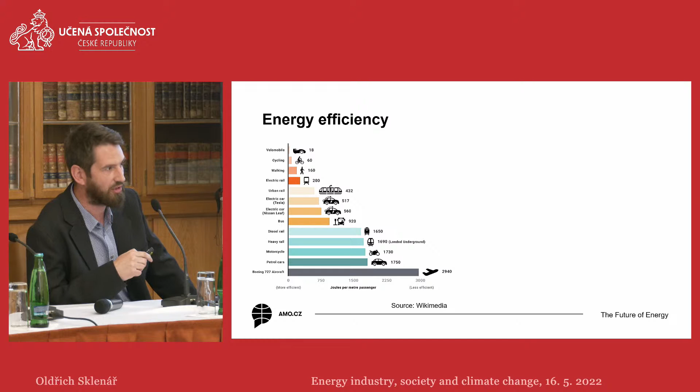If we do spatial or urban planning a different way, we can work with blocks, the so-called 15-minute city, which prefers walking or bike riding instead of cars. Another example of energy wasting is the way we obtain animal proteins. Yes, it's correct, I'm talking about fossil fuels.

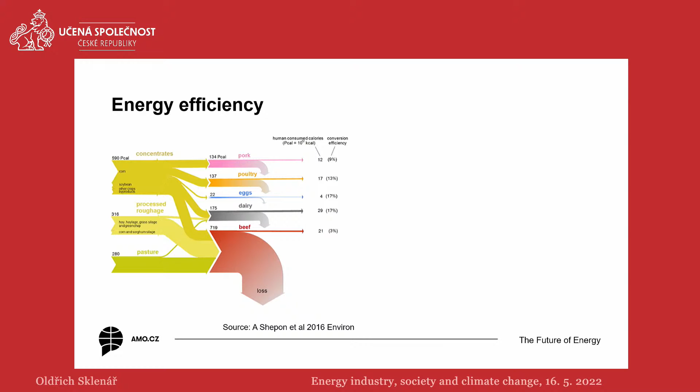The current situation is that first we use fossil fuels to produce fertilizers, to produce crops, and then waste most of those crops on the metabolic processes of livestock, which we then consume, in some cases overconsume, to suffer from obesity. That's also something which is maybe not very well known. I'm not sure if you can see it, but the efficiency of protein production is from about 3% in the case of beef up to about 17% in the case of dairy. The rest is the body heat which the animals need to live. But from our perspective, it's kind of wasted energy.

Maybe the biggest problem is that our demands are growing. We are heating or cooling larger and larger houses. The number of flats or houses is also increasing. We are using personal cars more and more. When I checked the statistics in the Czech Republic, there was an increase of about 1/3 in registered personal cars in the last 10 years. And that's not sustainable in the long term, because when we are struggling with how to produce energy in an alternative way, we cannot continue with such growth.

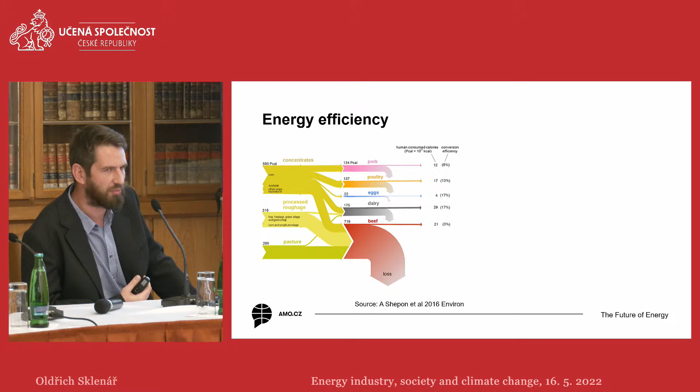The point is that Achilles is just a few steps from the tortoise. But he can't catch up with it, because whenever he tries to approach, the tortoise makes a few more steps. And we can be in a similar situation with our attempt to reach a zero carbon economy. Because once we set some goal, we can realize that it's simply not possible to reach because of this overconsumption.

So what I just want to say is that energy and related emissions is not just a question of the energy industry. The issue of rising consumption should be addressed across sectors, so not only energy, but also transportation, agriculture, etc. Decarbonization of energy production is and will be difficult. So we have to facilitate it through a systematic effort to reduce consumption. This includes not only technological but also organizational changes, or changes in consumer behavior, because otherwise we'll simply not be able to reach a zero carbon economy.